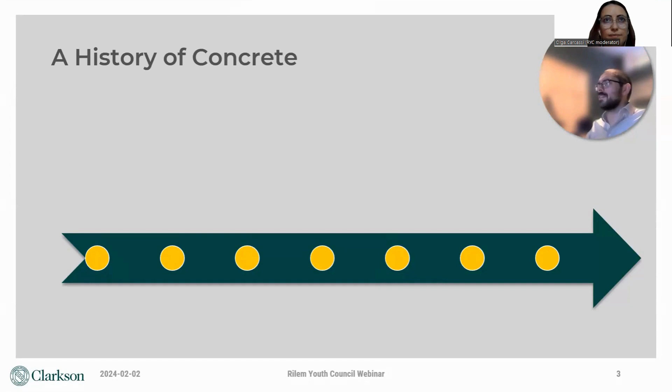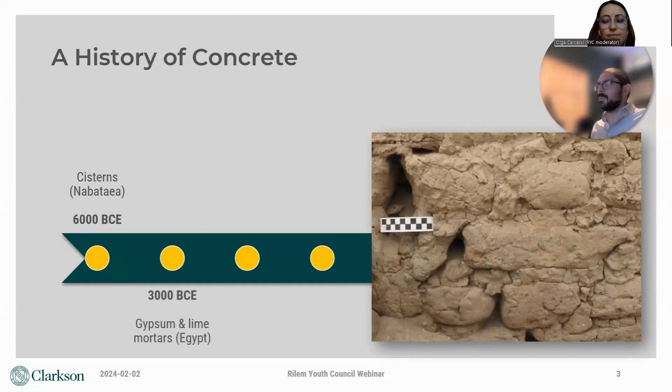Before we talk about that, let's take a short trip through the history of concrete. We hear a lot today about unlocking the secrets to Roman concrete. A lot of folks say that the Romans invented concrete, but that's not quite true. In fact, we have evidence as far back as 8,000 years ago of the Nabateans building masonry cisterns with hydraulic lime mortars. And there's evidence of Egyptian societies making masonry mortars 5,000 years ago. The Romans built the Pantheon roughly 2,000 years ago.

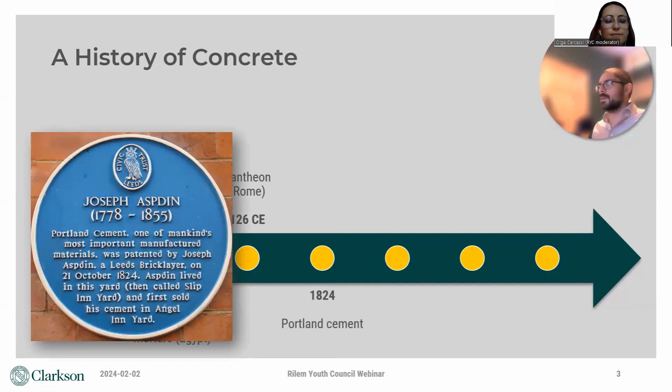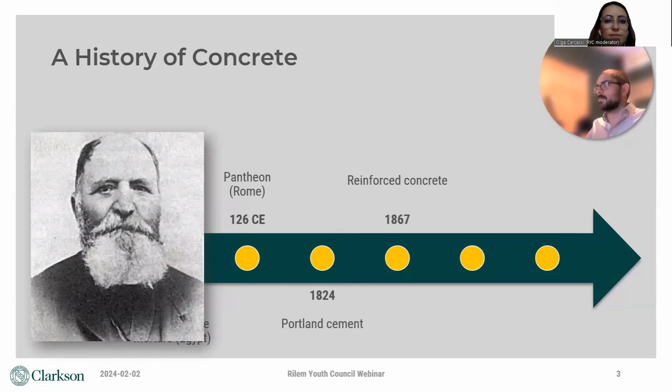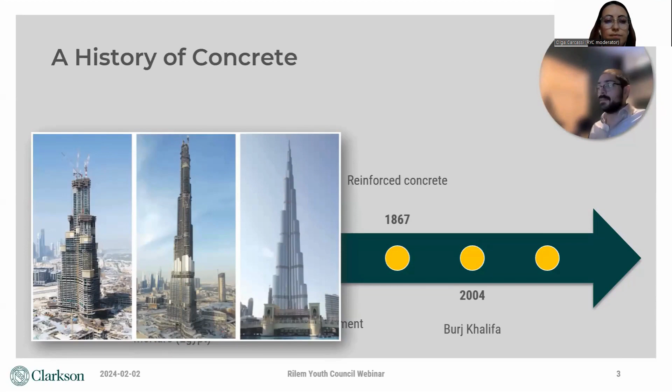It was almost exactly 200 years ago that an English bricklayer named Joseph Aspdin patented Portland cement, which is still the basis of nearly all the concrete we make today. Reinforced concrete didn't emerge until 1867, when a French gardener named Joseph Monier used steel rods to keep his concrete garden beds from cracking. 20 years ago, and less than 150 years after the invention of reinforced concrete, construction began on the Burj Khalifa, which still stands as not only the tallest concrete structure, but the tallest man-made structure of any kind. And just a few years ago, cements were hydrated aboard the International Space Station for the first time ever.

Let's talk about another critical date, December 7th, 1972. That was the last time a human being set foot on our nearest celestial neighbor, the moon. Apollo 17 was the 11th and final mission of NASA's Apollo program, which visited Earth's moon 6 times between 1969 and 1972. Each mission provided invaluable data about the geography of the moon, the composition of its soil, the conditions of its atmosphere, and more. But by 1970, the cost of the Apollo program had become astronomical, the public had lost interest, and NASA scrapped its plans for further trips to the moon.

Artemis, the twin sister of Apollo, is a fitting name for NASA's mission to bring humankind back to Earth's moon. Initiated in 2020, Artemis will bring the first woman and the first person of color to the moon. It will establish the first long-term human presence on the lunar surface, and it'll use the moon as a stepping stone to reach our next nearest celestial neighbor, Mars.

As part of the Artemis mission, NASA's Moon to Mars Planetary Autonomous Construction Technology, or MMPACT program, is developing technologies to support construction of key infrastructure on the moon. Repeated missions to the moon will require landing pads to prevent dust plumes, which can take hours to settle in the moon's low gravity. Extended human presence on the moon will require pressurized habitats and life support systems to protect occupants from the harsh conditions on the lunar surface. Broad exploration of the lunar surface will require roads, shelters, berms, and other civil infrastructure, and NASA has ambitiously targeted the late 2020s for the first demonstration-scale lunar projects and the early 2030s for construction of the first landing pads.

They were kind enough to share some of those samples with us so we could study their microstructures and properties. Here you see 3 Portland cement samples with lunar simulant aggregates that were hydrated at microgravity, lunar gravity, and Earth gravity. One of the most obvious changes we see is the appearance of coarse air voids in the space-hydrated samples. It turns out that gravity is extremely helpful in consolidating the fresh concrete.

We need phenomena like buoyancy to help air bubbles settle out of the fresh concrete, and these effects are diminished at lower gravity. Of course, we know that air voids represent stress concentrators inside the microstructure, and we know that these macroscopic air voids greatly weaken the strength of the material. But they also make it more permeable, which presents another problem for structures that need to be pressurized. And this is yet another challenge that we'll need to work to address.

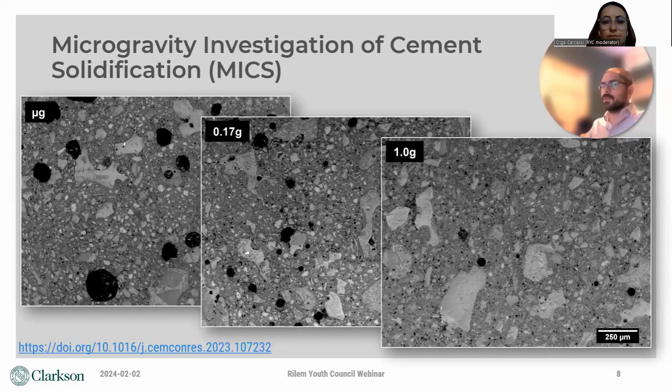We wanted to learn about the strength of the material, but it's very expensive to send samples to the space station, so the samples we send are far too small to perform any mechanical tests. So we do something called nanoindentation, which is when we take a microscopic probe and indent the surface along a grid pattern to see how hard and stiff the material is at that location.

Interestingly, we find that the micromechanical properties don't change very much at reduced gravity, which tells us that the dominating effect of microgravity is actually on the consolidation of the fresh concrete and the resulting impacts on the air void structure. This is important because once we understand the mechanism at play, we can theoretically design solutions to overcome that effect.

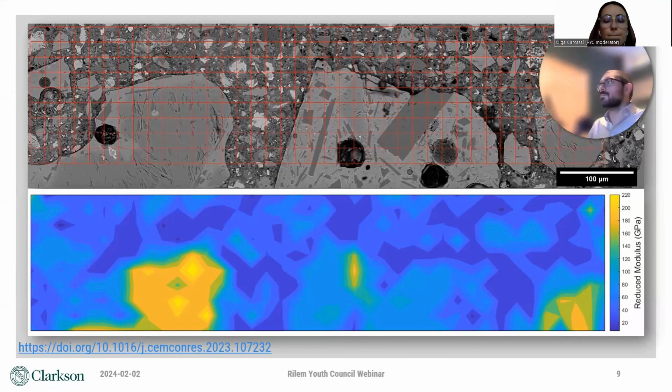As I said, though, the MICS study focused on Portland cement. And while it helped form a basic understanding of how cementitious materials might behave on the moon or Mars, Portland cement is really not a viable option for lunar construction, and the primary reason is cost.

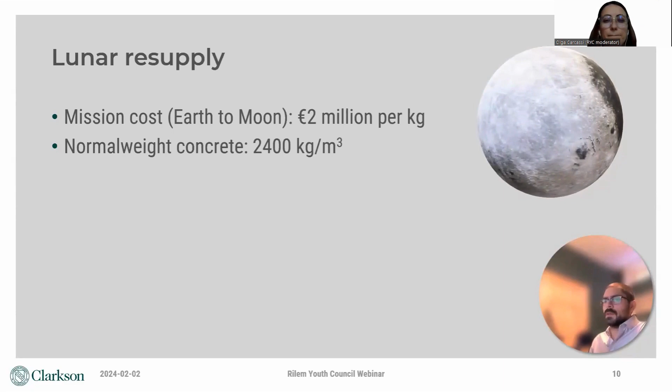Let's do a quick thought exercise. It costs about 2 million euros to transport 1 kilogram of material from the Earth to the moon. And normal weight concrete weighs about 2,400 kilos per cubic meter. So let's say we want to construct a landing pad. Maybe it's 20 by 20 meters and 300 millimeters thick. That seems like a reasonable landing pad to land a lunar lander. This equates to about 120 cubic meters of concrete and a projected cost of 240 million euros just for transportation of the raw materials.

Maybe we want to construct a 20-meter dome, some type of human habitat. Maybe it has 100 millimeter thick walls and sits on a 200 millimeter thick circular foundation. This is a pretty small habitat actually, and could potentially house maybe a small handful of people. That equates to 200 cubic meters of concrete for a projected cost of 400 million euros just for transportation of raw materials. This is clearly not sustainable, so we need to find a better solution.

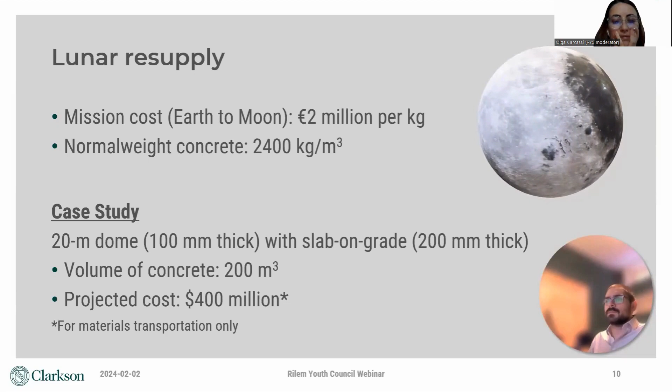That better solution is in situ resource utilization, or ISRU. According to NASA, ISRU harnesses planetary resources at mission destinations to enhance the capabilities of human exploration. In other words, ISRU is using what's already there.

Fortunately, over the last several hundred years, concrete researchers have developed a pretty robust toolbox of technologies that can be used to make concrete. One of those technologies is geopolymers, or alkali-activated concrete. Geopolymers are cement-like binders that are made by combining an aluminosilicate material with an alkaline activator. On Earth, we make geopolymers with fly ash or slag cement, but this technology works with just about any aluminosilicate material, of which the lunar regolith happens to be one.

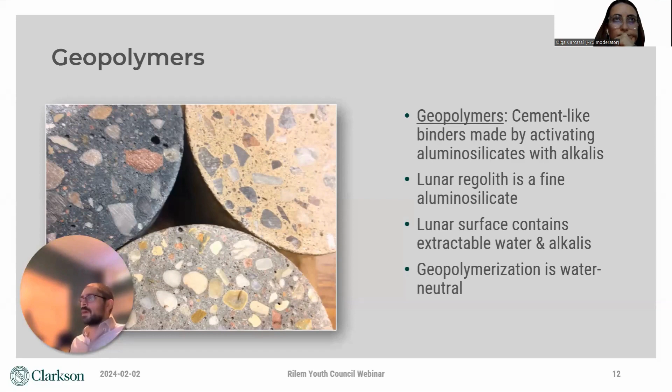Interestingly, the lunar surface also contains some extractable alkalis, so the activators could potentially be produced using the principles of ISRU. And finally, geopolymers do require water for mixing, for workability and consolidation, but the geopolymerization reaction is actually water neutral, so that water could potentially be recaptured. So lunar regolith-based geopolymers seem like a pretty promising solution.

But only a few hundred kilograms of actual lunar regolith have been collected from the 6 Apollo landings, and unfortunately, NASA is not about to give that away to a bunch of concrete researchers. Fortunately, however, various parties have produced what we call lunar simulants. These are carefully selected and graded mixtures of Earth minerals like volcanic glass and feldspar that can mimic the actual lunar regolith. Some of these are very basic simulants that model the geotechnical properties of the regolith, and some are more specialized simulants that mimic the chemistry or mineralogy quite closely.

We've used a variety of simulants, including the one I show here, which is JSC-1A, which stands for Johnson Space Center 1A. And even though this is made from terrestrial materials, the supplies are still quite limited. And with JSC-1A, actually only 40 tons of the material were ever produced, and it's currently out of production. So these samples are still quite precious.

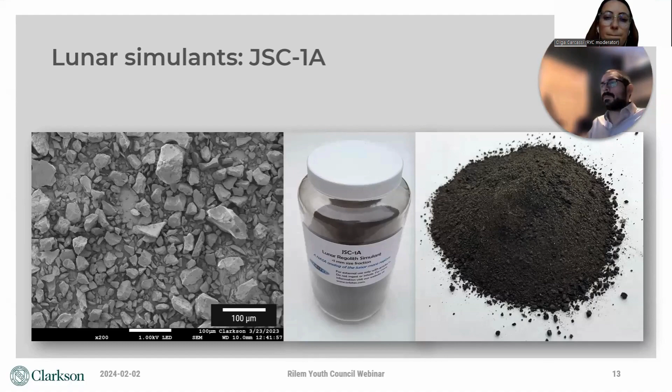Our colleagues at Penn State used JSC-1A and a variety of other simulants and a series of alkali activators to produce lunar simulant-based geopolymers. And again, they graciously shared some of the samples with us at Clarkson. One of the most interesting things we observed were the microstructures of the geopolymer samples. And here you can see an example of that.

The paste matrix between them is sparse and poorly refined, and this suggests to us that this combination of activator and simulant would perform poorly as a geopolymer. Practically, that means either the activator is a poor choice and perhaps a stronger concentration would lead to better polymerization, or the simulant might not be very reactive, indicating that lunar soils with this kind of composition are not suitable precursors for lunar concrete. Based on that, we could guess which regions of the moon could be mined for geopolymer precursors.

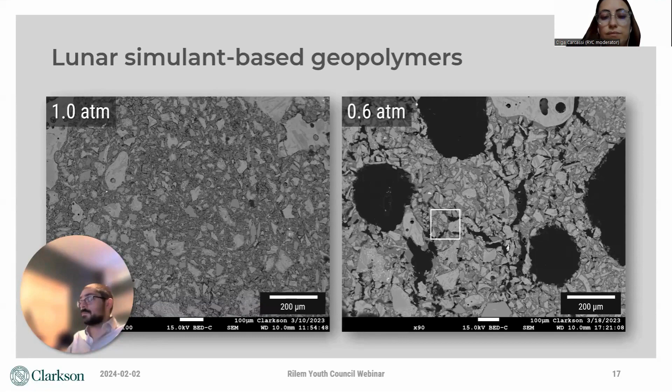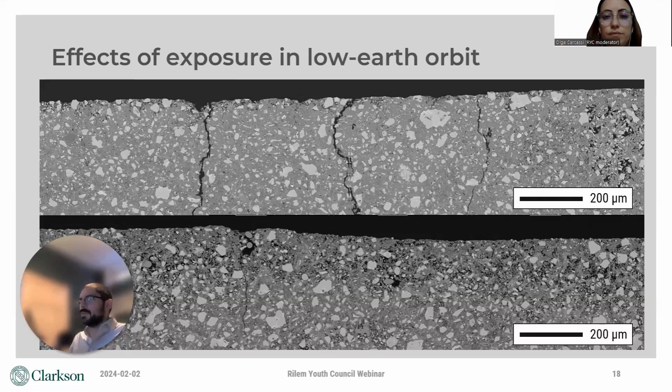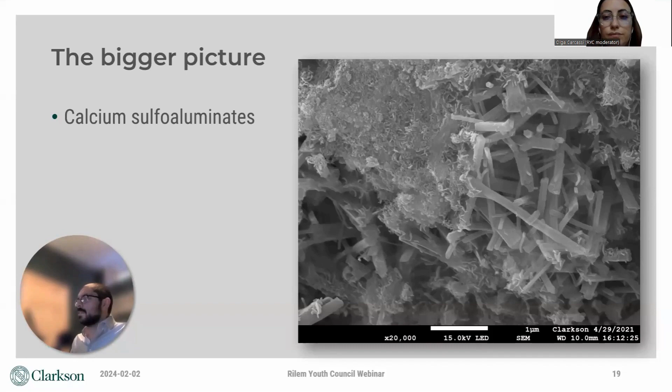So clearly we have a lot of work going on and we're trying our very best to develop lunar concrete technology and solve the various problems that appear along the way. But at this point, I think it's very important to acknowledge that our part of this work is small. There are so many other material technologies being developed that are just as promising, if not more promising, than lunar geopolymers. There are calcium sulfoaluminate precursors on the moon that could be used to make ettringite-based cements. This image shows the needle-like ettringite crystals that are the basis of these high early strength binder systems.

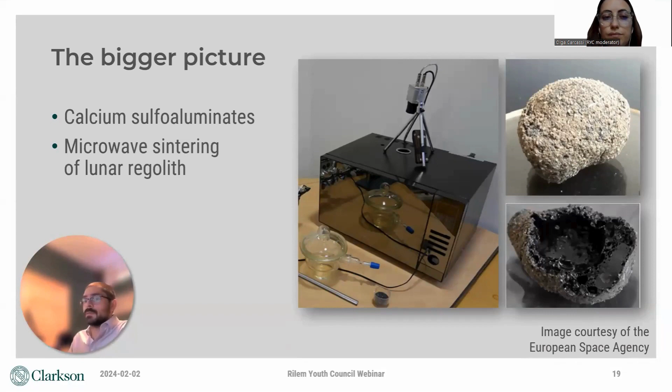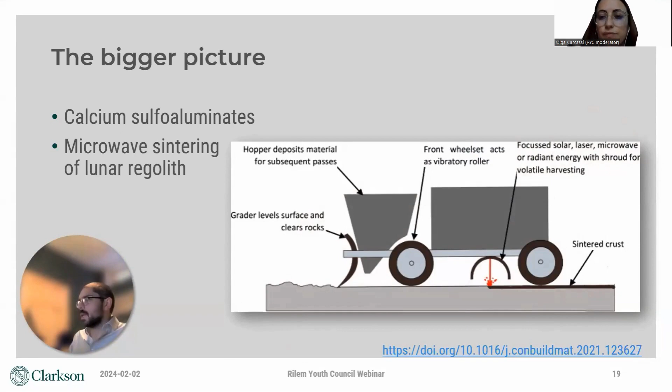There's also microwave sintering of the lunar regolith, where the regolith itself is melted and fused together to form a solid matrix. This is probably the most mature technology, and a great deal of thought has been put into how it can be used to make landing pads on the lunar surface. Here's one iteration where a lunar rover could theoretically be used to autonomously grade, compact, and sinter the regolith, forming a landing pad. There are also a series of other technologies that are quite promising.

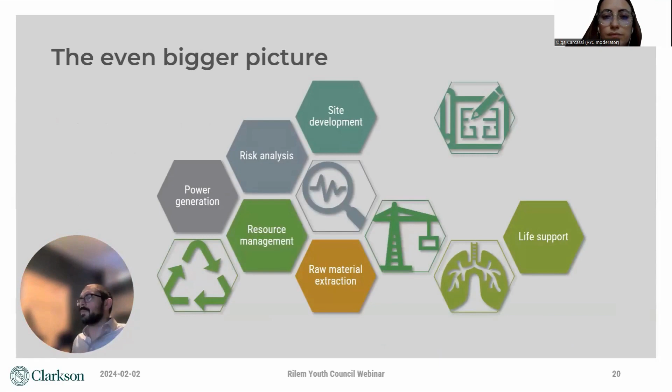But there's an even bigger picture beyond that. We've only talked about the construction materials part of developing lunar infrastructure. If we zoom out even further, we realize that the materials side of this challenge is still only a very small part of the mission. There are so many other barriers to extraterrestrial construction that need to be removed or overcome.

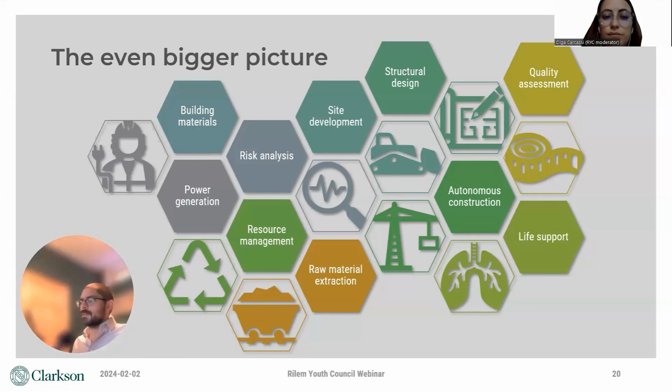We need to provide power and life support systems. We need to handle raw materials extraction and manufacturing processes. We need on-site testing and quality assessment. So while it's appropriate for us to have some pride in our work and the advancements we're making, it's equally important to have some humility and recognize that we're part of a tremendous multidisciplinary team working together to solve an enormous challenge.

With that, I would like to thank my students, collaborators, and sponsors, in particular Soleiman Dawood and Peter Collins, who generated most of the data and samples that I discussed today. Dr. Radlinska at Penn State, who is certainly the world's foremost expert on lunar concrete. And finally, our sponsors at NASA, who've provided the financial support for this work. Thank you all very much.

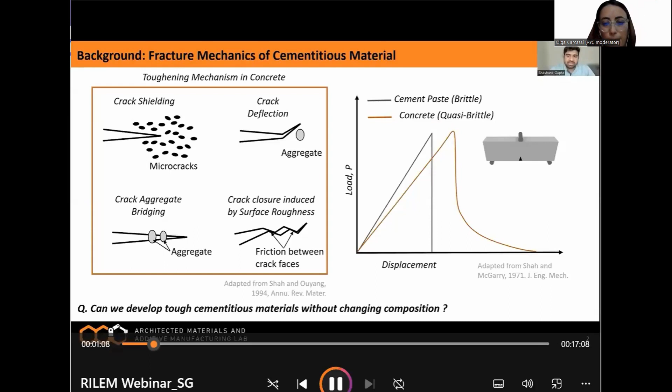Now, the question I would like to ask is whether we can develop tough concrete without changing composition, as a new way to enhance the inherent resistance of cement-based material to fracture. In other words, can we engineer cementitious material to have fracture resistance?

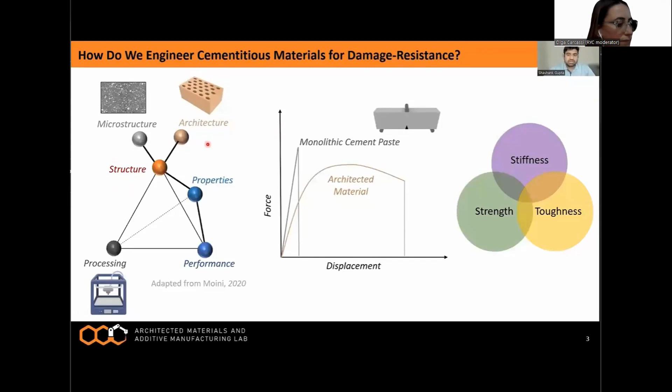What can help us to develop this material is the flexibility provided by the fabrication processes and the opportunities provided by the design of the material structure. Now, the material structure can be either microstructure or mesoarchitecture. The design of the material architecture can be used to tune the fundamental properties of the material to obtain the desirable performance, in contrast to the monolithic brittle solid. This further helps us to overcome the mutual exclusivity between strength, toughness, and stiffness.

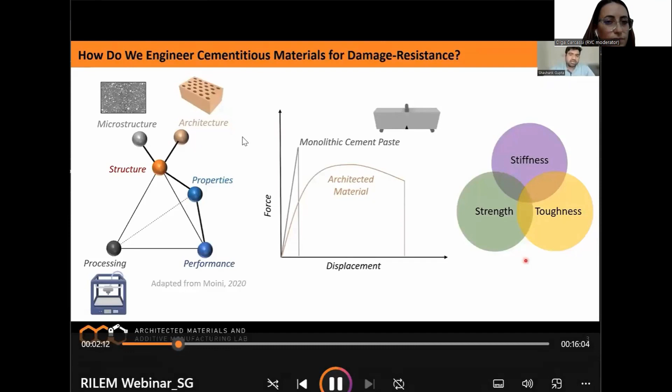Today, I will be only focusing on the strength and the toughness aspect of the material.

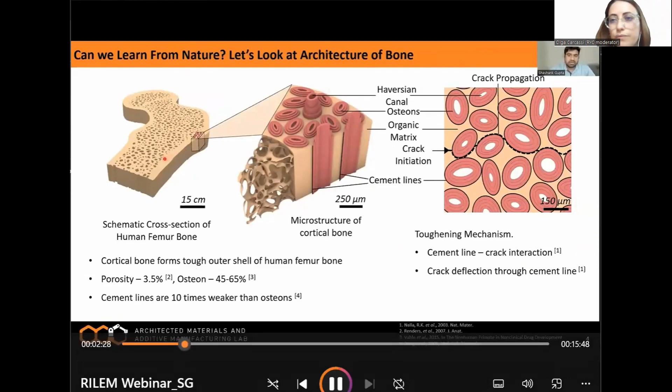When it comes to design, can we learn from nature? Let's look at the microstructure of the bone. The human femur bone is composed of outer tough cortical bone and the inner porous spongy bone. The cortical bone has two orders of magnitude higher fracture toughness than its constituent materials, hydroxyapatite crystal and collagen.

This increase in fracture toughness can be attributed to the presence of tube-like osteons embedded in the cortical bone. These osteons are weakly bonded to the organic matrix through cement lines. The cement line has nothing to do with cement, just to avoid any confusion. The cement lines are 10 times weaker than the osteons. So when a crack starts to propagate in the cortical bone, these weaker cement lines provide a microstructurally preferred path for the crack to propagate, hence triggering toughening mechanisms like crack deflection through cement line interaction in cortical bone.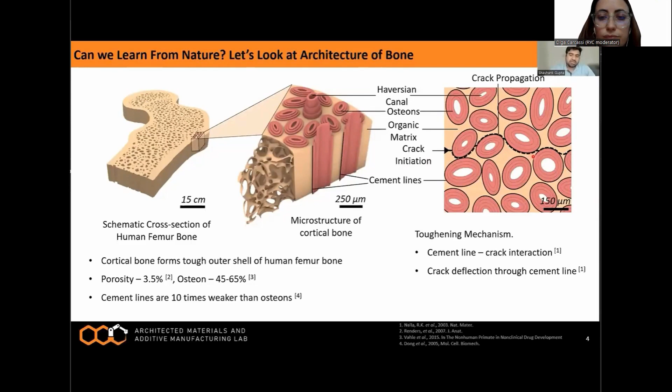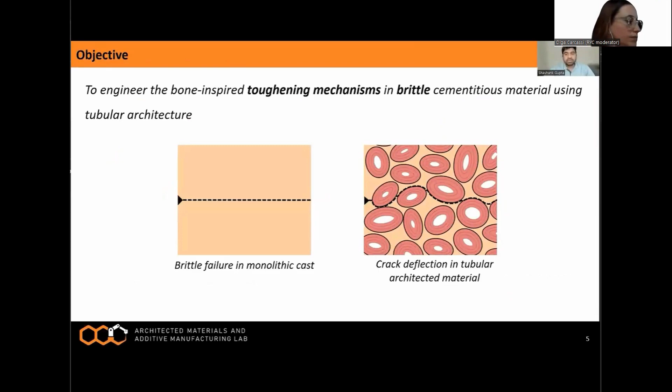Taking the inspiration from the cortical bone, we want to engineer these toughening mechanisms in the brittle cementitious material using tubular architecture. Furthermore, by tubular architecture, we mean the tubes like the cement line around the osteon, not osteons themselves. So let's see how we fabricate them.

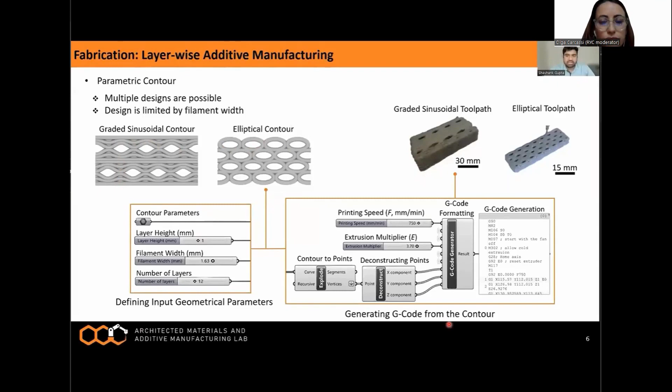Firstly, you can directly 3D print them. To do so, we have developed parametric contours like graded sinusoidal and elliptical to print tubular architected material by defining the input geometrical parameters. These contours can then be converted to G-code. In order to execute the whole process, we have developed in-house algorithms in Grasshopper and Rhino. Furthermore, there are several approaches to control the tool path. However, I won't get into the details for the sake of time.

Another method that we can use is a hybrid process in which we 3D print a PVA mold, then cast urethane rubber into it and demold the PVA to make this urethane rubber mold. Then we use this urethane rubber mold to cast the cement paste. This method enables direct formation of the tubular system in the cementitious material. And this is also the approach that we have used for what I will be presenting today.

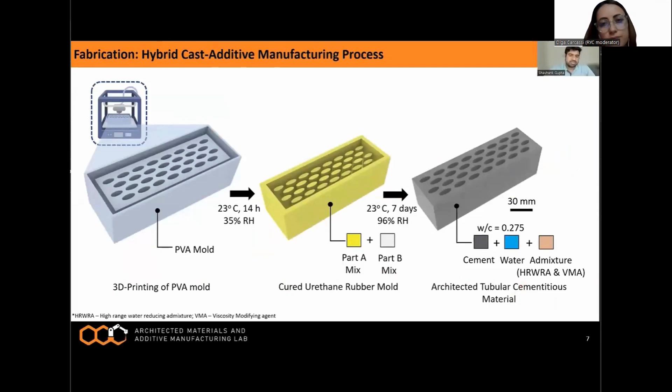Let me expand a bit on design parameters. So we have fabricated tubular architected material with porosity varying from 20 to 50%, and aspect ratio varying from 1 to 3, where 1 denotes the case of circle and any other value denotes the case of elliptical design. These parameters corroborate well with the volume percentage and the aspect ratio of the osteons in the cortical bone. Furthermore, I will only highlight the case of circular design with 40% porosity and the elliptical design with 40% porosity and aspect ratio 2.5 for the sake of brevity.

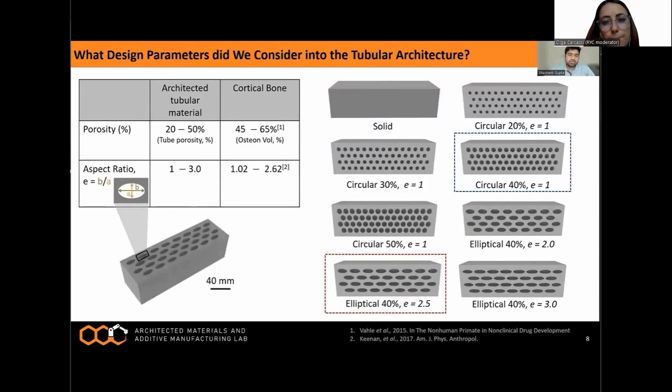The mechanical response was characterized by modulus of rupture and fracture toughness. The modulus of rupture was characterized using the ASTM C78, and for fracture response, the ASTM E1820 was used. In fracture, the compliance method was used for crack extension, and combined J-elastic and J-plastic terms have been used to calculate the fracture toughness as the crack propagates. We have also plotted the R curve to show the resistance to crack growth in terms of the fracture toughness.

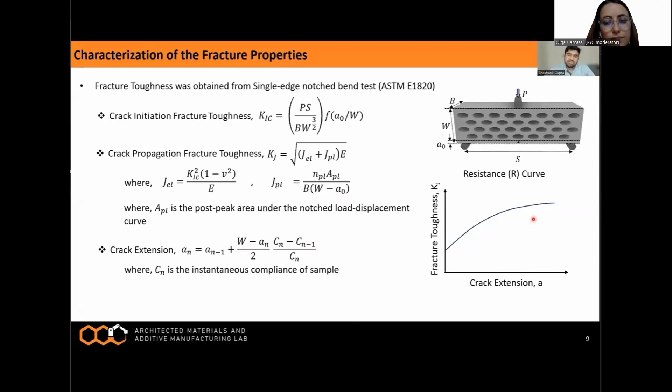So, what did we find? Let me show the highlights of some of the results for some of these designs. The load displacement response of notched specimens demonstrates that the architected tubular material, represented by blue color and the red color, shows a unique non-brittle fracture behavior compared to the brittle solid counterpart shown by the gray line. The architected tubular design demonstrates multiple hardening and softening behavior, which is evident from the multiple crack initiations.

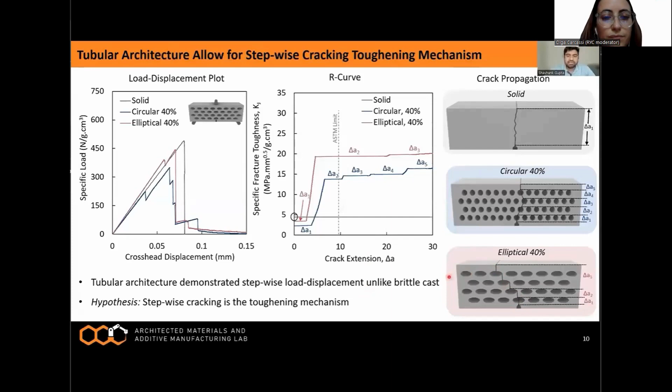The R curve shows that the toughness of the tubular architected material increased with the extension of the crack in a stepwise manner. This increase is directly correlated with the load displacement plot, where the softening corresponds to the crack extension and the hardening corresponds to the steep increase in the R curve. We hypothesize that the stepwise cracking through the tubes is the toughening mechanism which leads to an increase in toughness.

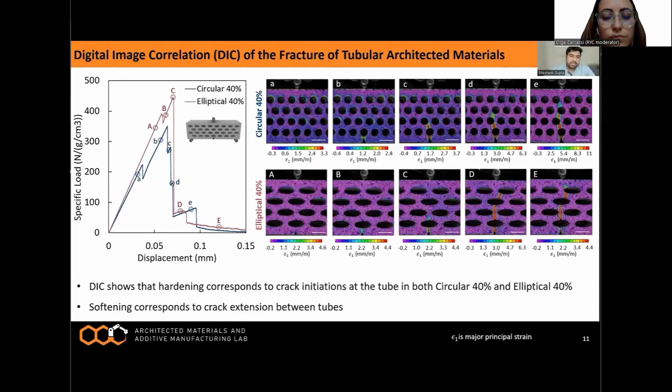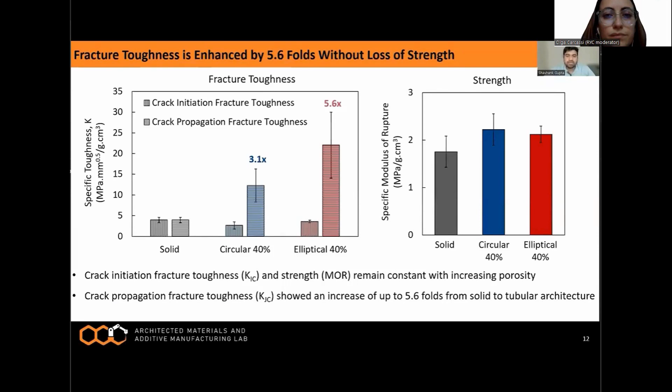For a better understanding of the toughening mechanism, we looked into the theoretical analysis of stress intensity factor and stresses at failure of the crack in the tubular architected material. Stress intensity factor is used to predict the stress state near the tip of the crack or notch caused by the far field stress, that is sigma x infinity. The stress intensity factor in the presence of a tube can be defined in terms of the stresses on the crack in the uncracked body due to the tubular elliptical void, as shown by this blue sigma x.

Now, the sigma x can be obtained using the Muskhelishvili equations. We are also defining the stress intensity factor ratio, which is simply the ratio of the stress intensity factor of the material in the presence of the tube over that of solid. The SIF ratio, defined as F, will help us easily look at the effect of the presence of the tube relative to its absence. That is the case of the solid material.

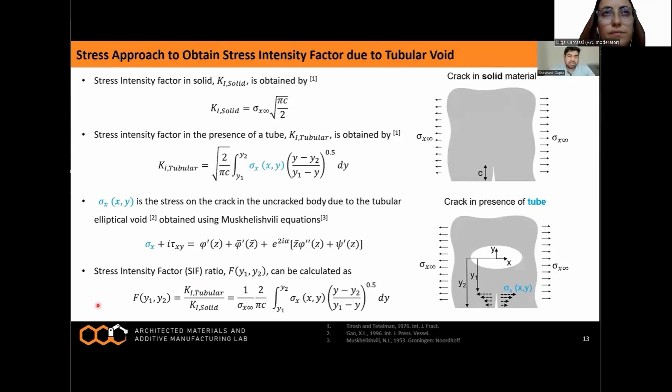Here I'm showing the plot of stress intensity factor and far field stress in the solid, and in the presence of the tubular void of circular 40% and elliptical 40% with an aspect ratio of 2.5. In a brittle material such as cement base, crack initiates when the stress intensity factor becomes equal to the critical stress intensity factor, according to the Griffith's energy balance approach. Consequently, the intersection of the stress intensity factor and far field stress plot with the critical stress intensity factor yields the far field stress at which crack initiation takes place, as shown by sigma x infinity solid. We can see that the stress at failure in the tubular architected materials is smaller than the stress at failure of the solid.

Using the previously presented definition of stress intensity factor ratio, we can define the stress at failure in the tubular system as the stress at failure of the solid counterpart over the SIF ratio. In the same way, the load at failure in the tubular system can also be defined in terms of the SIF ratio. Using this SIF ratio, we can also look at the effect of tube size and shape.

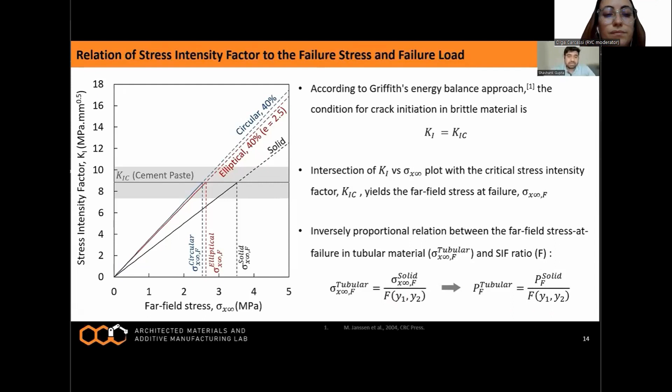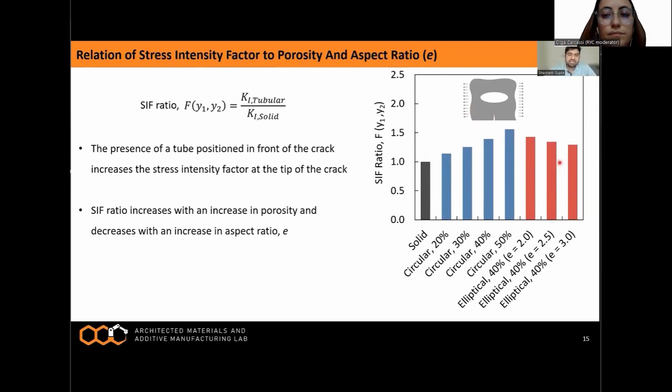Based on our discussion in the last slides, we have calculated the stress intensity factor ratio for different porosity and aspect ratio of tubes. For the solid system, in the absence of the tube, the SIF ratio is 1. That makes sense. We can say that the presence of the tube positioned in front of the crack increases the stress intensity factor at the tip of the crack. The SIF ratio increases with an increase in porosity, and it decreases with an increase in aspect ratio, which is an interesting finding.

Using the relationship between the SIF ratio and the load at failure, we have also plotted the theoretical load at failure for different porosity and aspect ratio. We can see that the theoretical load at failure decreases with an increase in porosity and increases with an increasing aspect ratio. The theoretical trends for the single tube also match the experimental trends of the load at failure for a fully tubular system. The results regarding the load at failure indicate that the tubular system with higher porosity and lower aspect ratio

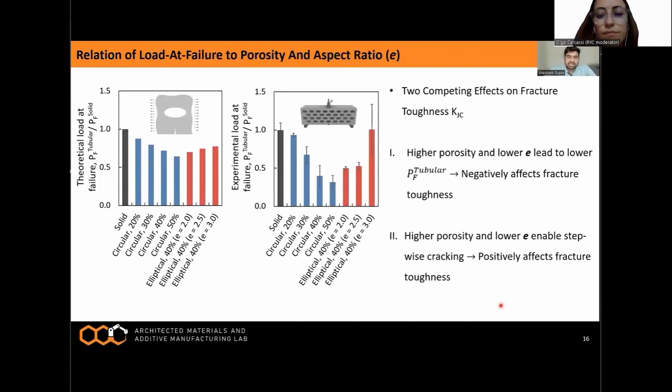exhibits a lower load at failure, which negatively affects the fracture toughness of the cement-based material. However, the same characteristics of higher porosity and lower aspect ratio in the tubular architected material facilitate stepwise cracking, which in turn increases the material's fracture toughness. Hence, we can say that load at failure and stepwise cracking have competing effects on the fracture toughness.

If you look at the broader range of tube size and shape, the competing effect of load at failure and stepwise cracking gives rise to optimal fracture toughness in certain cases. For instance, among the circular cases, the porosity of 40% exhibits the best fracture toughness, as shown by the blue dots. On the other hand, among the elliptical cases, the porosity of 40% and aspect ratio of 2.5 exhibits the highest fracture toughness, as indicated by this red dot as well.

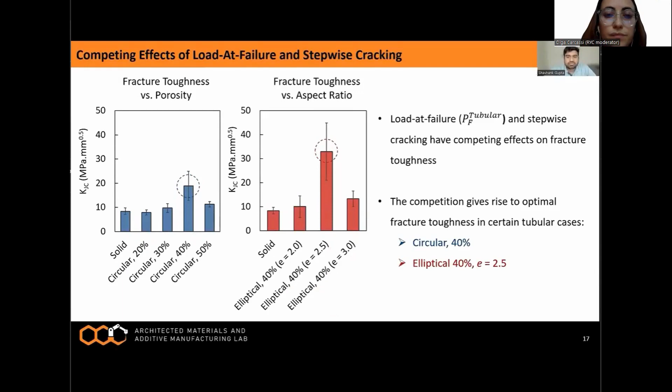The theoretical analysis that I showed before for the stress intensity factor was conducted for a single tube. The superposition of multiple tubes and the positive and negative effects of their location on the stress intensity factor can be considered to better capture the experimental analysis. It is also interesting to note that the SIF ratio of the crack tip increases or decreases depending on the position of the tube from the crack tip. The theoretical determination of the stress intensity factor can be extended for better comparison of experiments and analytical model, considering both the superposition of the effects of multiple tubes at various locations ahead of the crack tip, as well as the bending stress state.

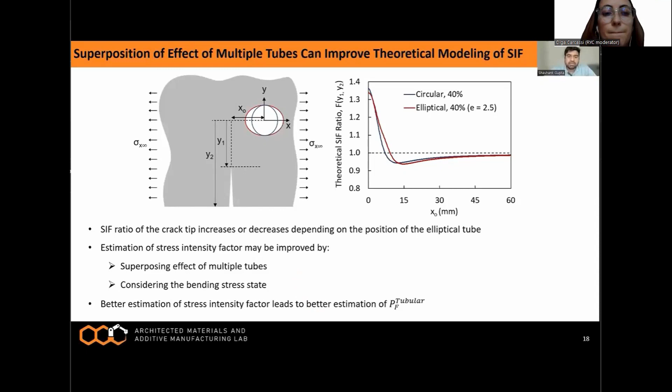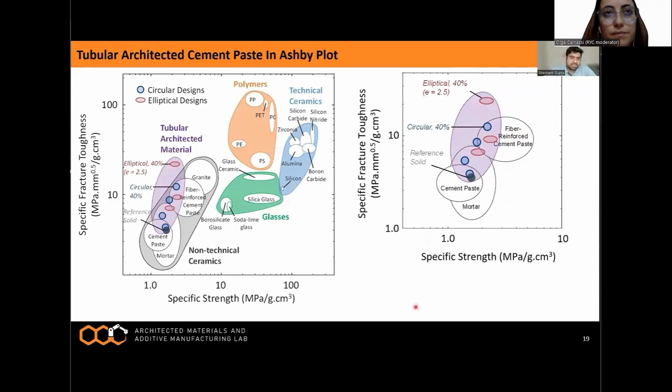In conclusion, we showed that hybrid or additive manufacturing can be used in a variety of ways to architect material. However, further work on scaling up is necessary. We also learned that toughening mechanism inspired from bone can enhance the fracture toughness of brittle cementitious material up to

5.6 times. The stepwise toughening mechanism can be further engineered by the competition between the tube size and shape on the failure stress intensity factor and loaded failure. And finally, considering our first question, can we make a brittle material tough and non-brittle without changing composition? Yes. By engineering the architecture, we can achieve toughness strength trade-off without changing the composition. Digital workflow for additive fabrication can help make realization of these materials more viable and accessible.

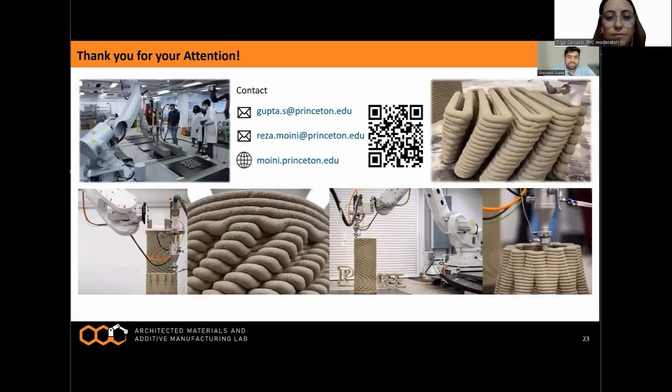Well, thank you so much, Shashank, for the presentation. And I would like to again suggest to the audience to post their last questions for both Robert and Shashank. Albert, I think we can start with a question for Robert. Yeah. So I saw there's a question that has already been answered, Robert. I don't know if you want to elaborate a little bit more.

Yeah, sure. I can do that. So someone asked if anyone had looked at the sintering kinetics of the lunar simulants or of the formation of CSA cements in any rigorous way. And CSA cements have been around for a really long time. There's a huge body of research on those. They were invented in the 1960s, so there's a lot of information on that. I'm not exactly sure about the kinetics of sintering, but I did pop a link in the text answer here that has a really good review paper that was recently published if you're looking for more information on the sintering of lunar simulants. I think that's a great place to start.

Perfect. Thanks, Robert. I see another question. Ahmad Hassan is asking you, Robert, about the type of fibers that were used and if there is any consideration for fillers at certain gradation range to fill the voids.